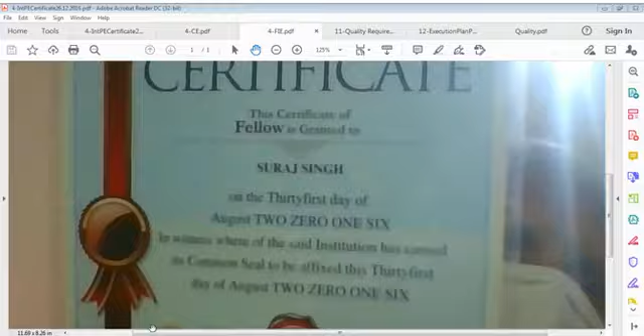This is the certificate of Chartered Engineer, and this is the certificate of Fellow, FIE, Fellow of Institution of Engineers. I usually put these certificates so that you should know the identity of the person.

These certificates carry some meaning, that a person has efficiency in some field, and that efficiency must be exhibited in life. If somebody is a chartered engineer, a professional engineer, it conveys a meaning to people that that person has been testified, his competency is valid.

If we use this person, they must deliver something which is required of that person. That is what this certificate conveys, or whatever certificate people have: degree, diploma, master's, doctoral, or any other professional certificate in whatever profession. These certificates publicly declare - every certificate is a public declaration.

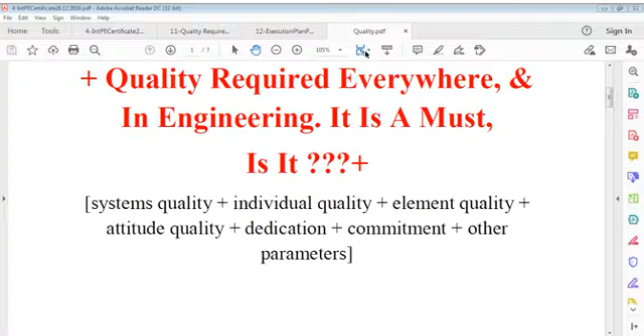There are other parameters which we have to care about in quality, and we move further on to that. The design of structures is another area, because I am dealing with structures, engineers deal with structures, mechanical engineers deal with machine structures and machine designs, electrical people deal with their own system - transformer designs, switchgear designs, and other designs like distribution boards, load calculations. How much electrical load shall come on this building, on this project - they calculate their loads, and similarly other disciplines too. So it's a total system, total theory, total practical theory of design, theory of analysis, theory of structure. All these come into picture.

Ultimately, directly or indirectly, mathematics is involved. You have to calculate electrical load, HVAC load, this load and that load, you have to calculate dead load on structures, live load in structures, you have to calculate other loads - wind load and seismic, etc. We have to do that, it is very normal. There is nothing new in that, and everybody knows according to their own discipline, according to their branch of engineering.

So designs of structures and others must be qualitative and reliable. Design procedures exist, theories exist, everything exists, but thinking doesn't exist.

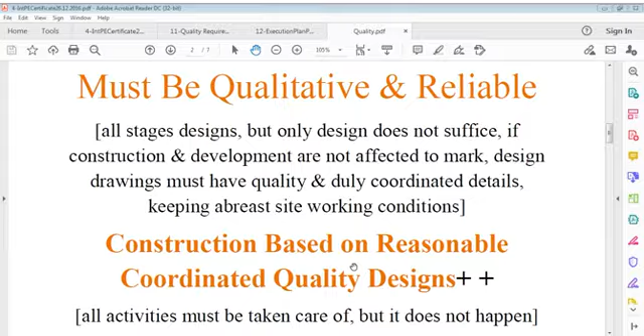Engineering means use your mind, think on, use your mind, and that's a very important point. Thinking doesn't cost anything except time. Thinking doesn't cost anything except your knowledge. And thinking means use of mind repetitively.

Concentration comes from use of mind. If you use mind for the same thing, in the beginning maybe I could not find any answer to my problem. But if I go on thinking like that, certainly the problem would start to be solved. Because your mind works, it grasps something, it has an inbuilt system in our soul that solves that problem. That's what I say, though the explanation is always different.

Thinking, I can use it as a formula, I can use it as a command, I can use it as a direction, I can use it as my own teacher. That thinking pushes me. When I have problems I am not able to solve urgently, I get nervous. But that state of nervousness of an individual can be neutralized by the process of thinking.

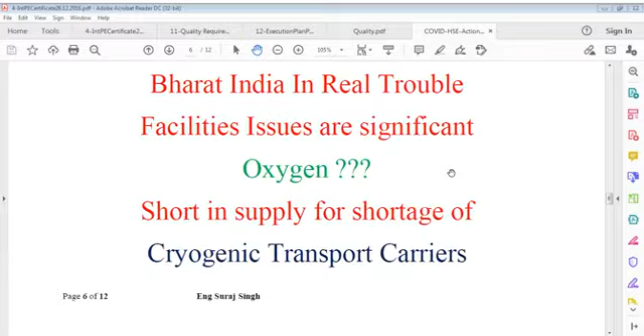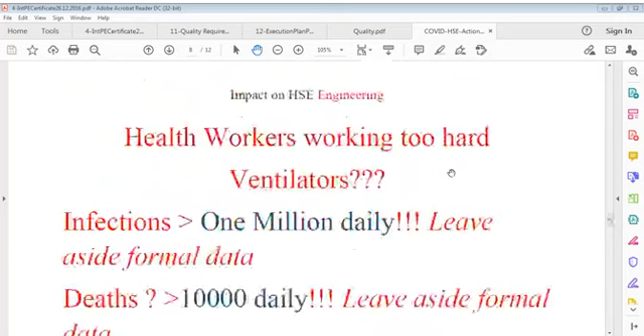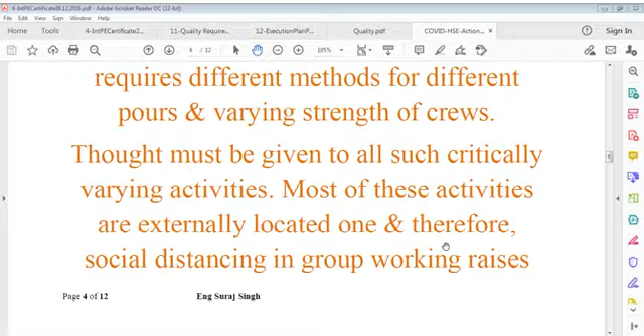That's what I say - Bharat, India, in real trouble. Facilities issues are significant, facility also I can talk about, that is also important. I last time talked about this. Let me repeat it better. It's a safety issue. It's the responsibility of the entire engineering professional community to contemplate on working issues, site working issues, that would be impacted upon due to additional protective measures requirements.

So many activities are critical in a sense which do not permit this. Okay, fine, it's okay. Well, I think I did not do that in this way. I'll include that one later on, now I don't have time for that.

So here you can say, let's take - if I have to design some home, some residence, it may be single story or it may be a multi-story high rise - the engineer has to start thinking now, real time. Design is one part, but planning is also a part of design, which says that if I have to design a multi-story building, structure design is not affected. I'm not saying about that.

What I'm saying is, say I have toilet, bathroom, washroom or WC which are linked to sanitary stacks. You know stacks - vertical pipes connected to waste of WC, night excreta for WC, or bathtub, bathroom, or kitchen. All these are connected to stacks, external stacks, which may be plastic pipes these days. In the past these were cast iron pipes, now these are plastic pipes. I'm not talking of the material of those, but I'm talking of the function of those.

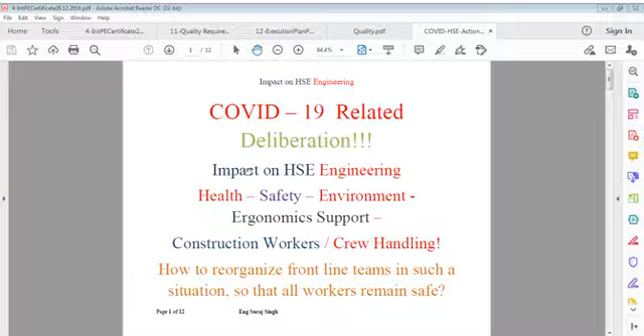Very important point from that aspect we have to consider. And before going further, I think we have to take a short break.

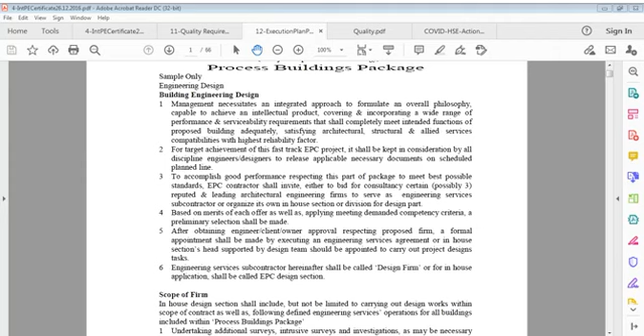So we have to continue on this issue. I was talking about two issues - one was the air conditioning issue, the other was the sanitary issue. Both are important and we cannot do without that. It's a very important point. We have to understand these two issues. Certainly we have to understand - there's no way we can go without that.

Now the point is how much we can move on that. That's the important point. And when I say that, we have to consider in our design the size of duct, which means we have to enlarge our duct size.

Width is not an issue here. The issue is length - maybe you have to make it 3 times, which means the size of the bathroom will be affected, or the room would be affected. Or you have to take different locations at various floors, or stagger your bathroom sizes - 3 in one, then another 3 in another.

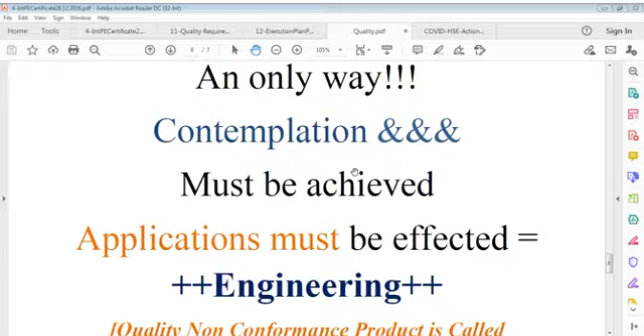But about this design, there's a question mark, so we should understand that design, and we should understand our requirements, and what requirements we have to keep in mind.

Now, quality requirement, and this COVID I close. I think I've talked of this, so better I close it now.

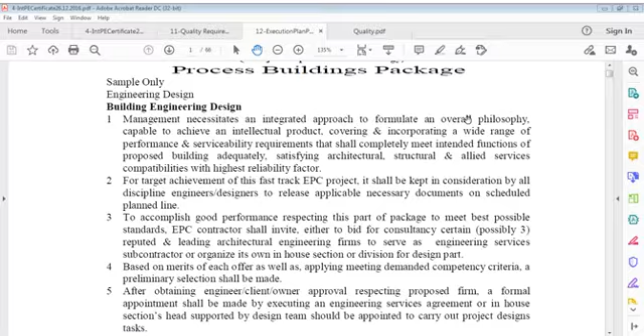Also one file is follow-up, that is building engineering designs, which I discussed before also, but this is such a subject which can be taken up many number of times for further explanation.

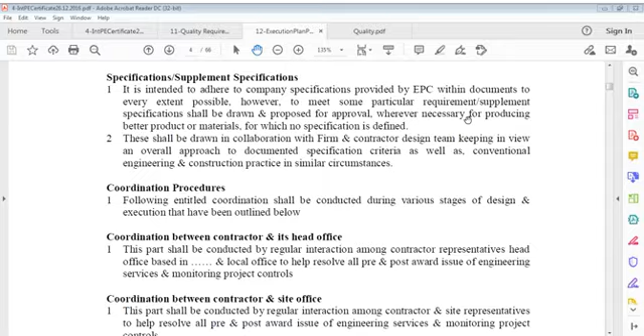Building engineering design, scope of firm, then building services, and detailed engineering design, services designs, specialized designs, specifications, supplement specifications, coordination procedures, coordination between contractor and its head office, coordination between contractor and site office, coordination between contractor and firm, and coordination between contractor, firm and EPC.

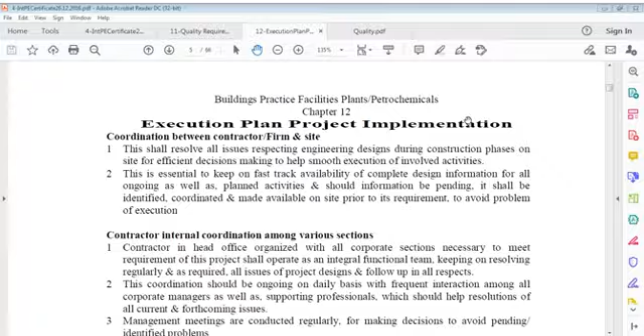There's coordination between firm and site, contractor internal coordination among various sections, likewise review and approval of documents, CAD procedures, engineering reporting and change control, then document control procedures, vendor print, numbering, review and distribution procedures, as-built drawings.

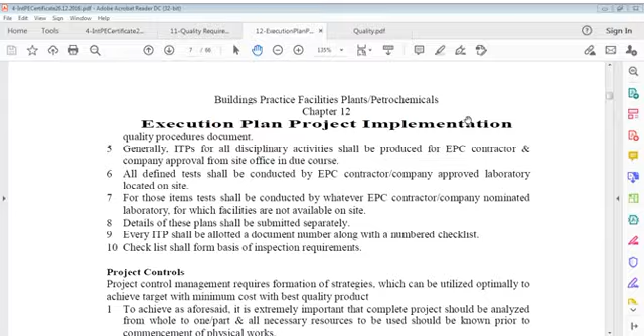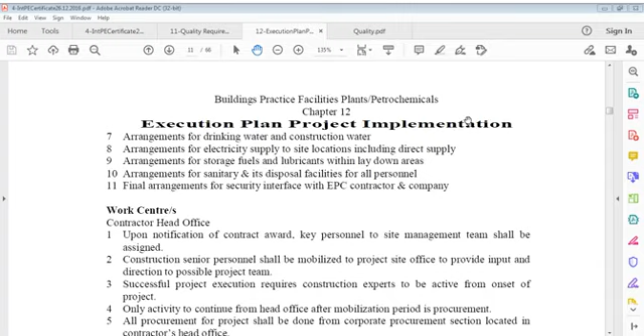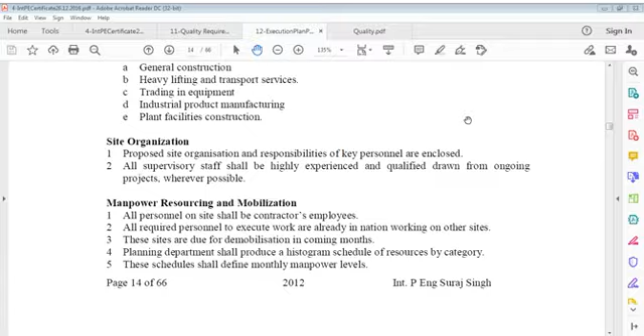Inspection and test plans, project controls, procurement, pre-mobilization planning, work centers, mobilization, subcontract strategy, testing and inspection, material management organization, procurement, corporate organization, site organization, manpower resourcing and mobilization, and like that, construction method statements.

This way we are going to talk a lot on this. There's so much in that you can see. This can see further, you can browse and you can see.

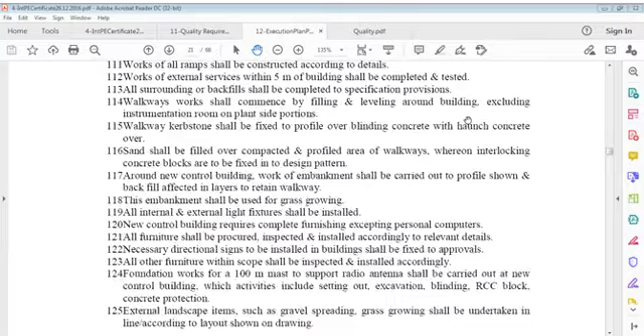And then method statements likewise, so we can see there's a lot in that. We can learn, or we can refresh, if not learn.

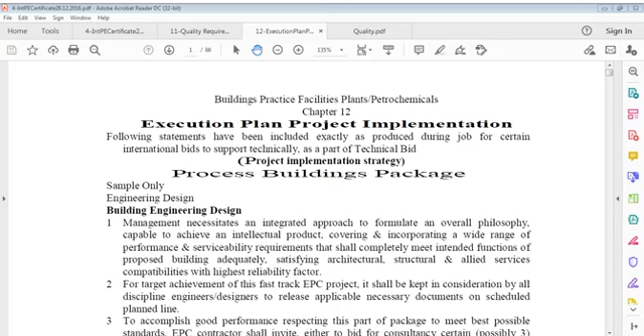Yesterday I talked of something. I was talking of quality requirement, and we had covered certain points in that. I think I was on lift, right?

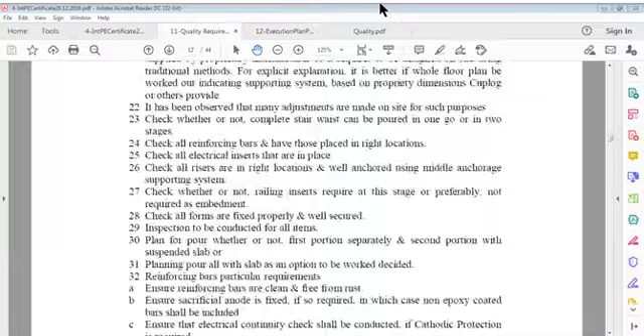No, that's too far, I've gone. Lift well works, okay, this was that.

This is important item. Important in a sense that you have to understand what I'm talking of. If I can say...

I like to go there only. I want to see this file. I want to see that file, and that is the method statement file. I'm trying to find that file.

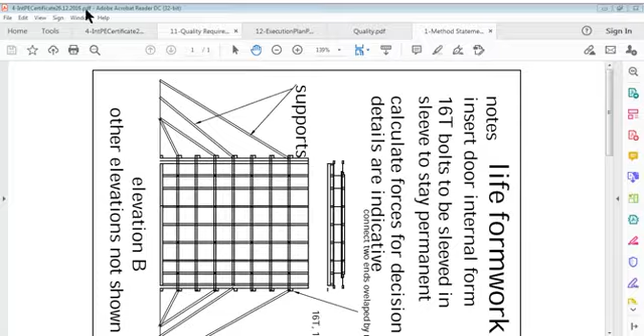Lift. Wall forms and lift form. Yes, it was that.

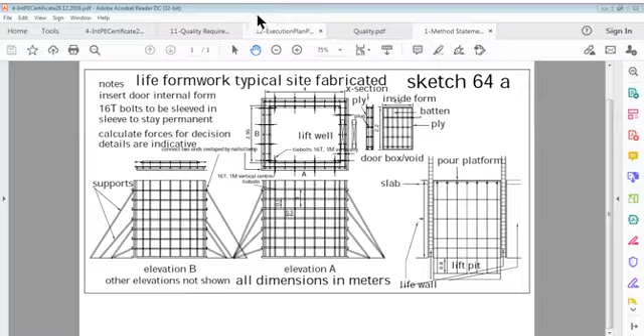So lift it is, and I was talking, you can see again this sketch explained yesterday that we have this proposed concrete, and this is lift well. These are walls, RCC walls, and if you see here section, this is lift pit, this is plinth level or ground level, and this is pit here, it's concrete here, and this is a lift wall.

In which the lift car will move. This portion the lift has come down, and this base, and what is interesting, we have to pour these walls in this portion. We have to pour in each floor, and there is a door also which you have to keep out of the concrete. This is basic requirement, and I had explained to you about how we have to do that, how we have to compute forces, how shall we handle it.

It's not that easy as we think. It's a lot of work in this requirement.

Let me explain to you that there are two stages in pouring these lift walls in one story. I'm saying stages, I'm not saying layers. In one stage, this height is 2.2 meters, that is the door of the lift. Up to this we have to pour, and then from there onwards, up to whatever height is there, we have to pour. So these two stages, of course.

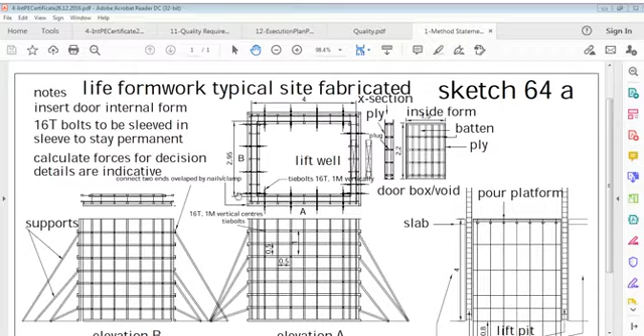This formwork here, this is both sides formwork. It can't be one side. It has to fit in. So this is, you can say, double formwork. And also like this double formwork here for the wall. And you can see all of the details, same typical.

As I said, this is void, and this is plates. This is standing battens at 0.5 meter, and you can say 8 sides, 4 sides A and 4 sides B elevations, and this is normally done. So we can now speak about this. Let us see how does it work.

Yesterday I read it again because it's an important one. We have to understand it all the time. It's better if you understand it all the time rather than risking it. I don't want to risk it, I want to understand it, and that's the main point. So we can say checklist for RCC lift well walls.

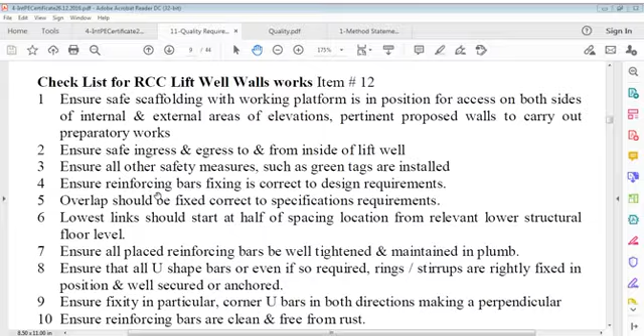And ensure all the safety measures such as green tags are installed, which means this system, whatever we provide for ingress and egress from the working area, from inside as well as outside, internal to external, this must be certified, this must be tagged by safety engineers, so you can say that this is a norm of safety.

Then you can say, ensure reinforcement bars are fixed correct to design requirement. That's very much structural work. Already bars are there up to the starter, taken from the pit. Now we have to fix all bars of reinforcement up to a level of 4 meters and overlap further, according to whatever is given in the drawing. You have to fix all those reinforcing details according to your drawing, and these bars, which you have cut and bent according to the bar bending schedule, must be fixed or placed correctly and in compliance with design requirements. Overlap should be fixed correct to specification requirement, no change, whatever the specification requires, this should be there. Overlaps mean 50d or 40d according to tension requirement or compression requirement respectively, and that's what we have to do.

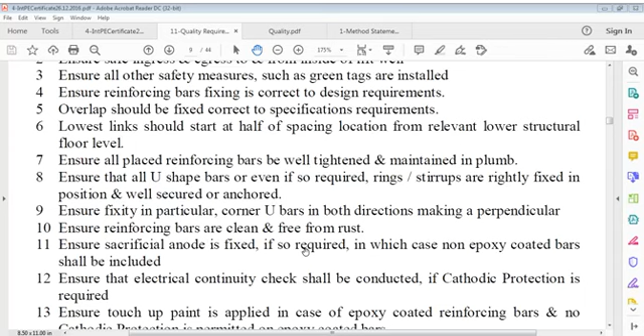Of course there are U-shaped bars at corners. I told you yesterday also, U-shaped bars would be here. At these corners, U-shaped bars in both ways at 90 degrees, here this way and that way, and you can fix a U-shaped bar here as well if possible. So rings or stirrups should be rightly fixed in position and well secured or anchored. Ensure fixity particularly at corner U-bars in both directions, making them perpendicular.

Ensure reinforcing bars are clean and free from rust. That's a very important point I always say, that these bars must be rust free. No engineer accepts a bar with rust. That's not good and not permissible. This is going to be a durable structure and we can't allow rust in that.

So reinforcing bars must be clean and free from rust, and if these are epoxy coated bars, the question of rust doesn't arise. Then we have to consider application of sacrificial anode. Ensure the sacrificial anode is fixed, meaning the anode accepts oxidation instead of the bars, so the anode is responsible for that rather than the bars being oxidized. With due controls, the anode is oxidized and rusted. It's made of aluminum, with an electrical mechanism involved, so ensure the sacrificial anode is fixed.

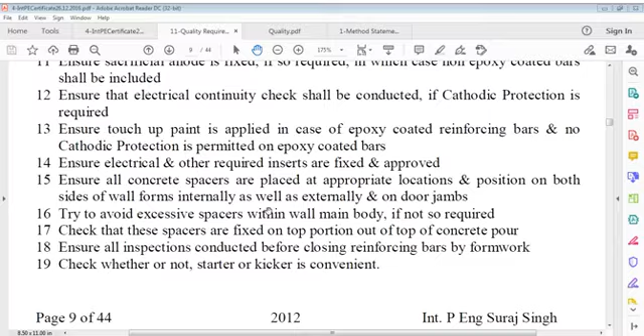Now you can say electrical and other required inserts are fixed and approved, and concrete spacers are in place. Try to avoid excessive spacers. That's fine, you can remove them, and check that these spacers are fixed on top portion, out of top. I told it. Now ensure all inspections are conducted before closing reinforcing bars by formwork.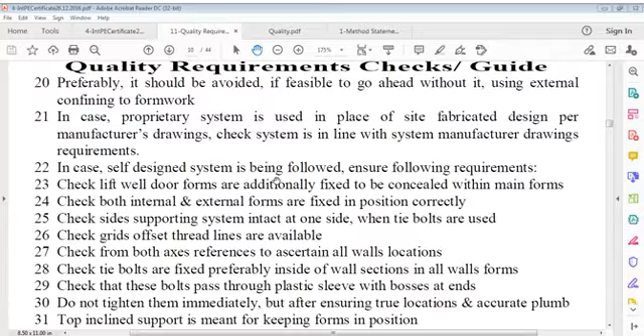Check whether or not starter or kicker is convenient. Preferably it should be avoided if feasible to go ahead without it, using external confined support for that. So avoid it. And what's that? Check whether or not starter or kicker is convenient. Nobody likes kicker. If it can be avoided, there are ways to avoid it. I have done it. But if you know how to provide it, there's no barricade, you can provide it.

It's only 10 centimeter or 15 centimeter thickness. It just gives you a facility that your form at bottom is fixed, but sometimes it causes a problem also in alignment if there's some error in kicker. Then you may not realize that this problem is coming from the kicker because you have no such experience. In that case, you can say, okay, let him come back.

Then we can say, okay, let's go further. Preferably it should be avoided, the kicker, if feasible to go ahead without it, using external confining to formwork. In case we are able to remove or avoid kicker, it's better. Due to misalignment also it may cause some problem in formwork, and we have to sometimes chip one side or two sides. It's problematic sometimes.

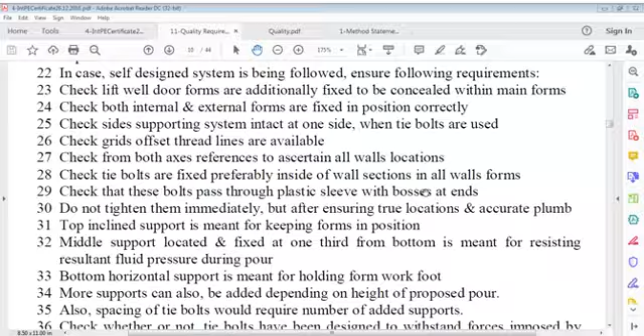Check that tie bolts are fixed, preferably inside of wall sections, in all wall forms.

Check that these bolts pass through a plastic sleeve with bosses at the ends. The bosses would be removed later on and filled in with some construction chemical.

Do not tighten them immediately, but only after ensuring true locations and accurate plumb. The top inclined support is meant for keeping forms in position. Top and bottom supports are meant for fixing the form sections particularly.

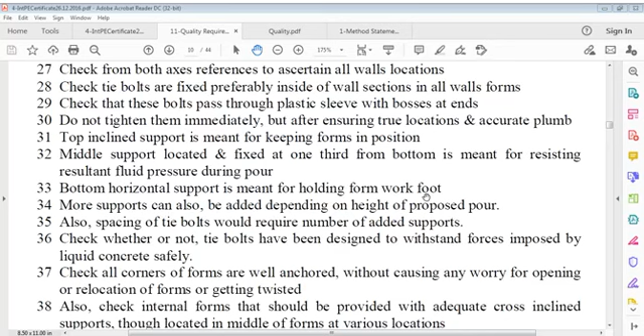The middle support, located and fixed at one-third from bottom, is meant for resisting the resultant fluid pressure during the pour. H/3 is the height of application of fluid pressure.

When you calculate fluid pressure for water retaining structures, that's called WH/2 - the horizontal force intensity. If it's multiplied by H/3, it gives you WH²/6, which is the moment.

Keep this in mind: the moment at the bottom is this much, and this is the core.

Then we can say we have reached the statement to check whether or not the tie bolts have been designed to withstand forces imposed by liquid concrete safely, and check that all corners of forms are well anchored without causing any worry for opening, relocation of forms, or getting twisted.

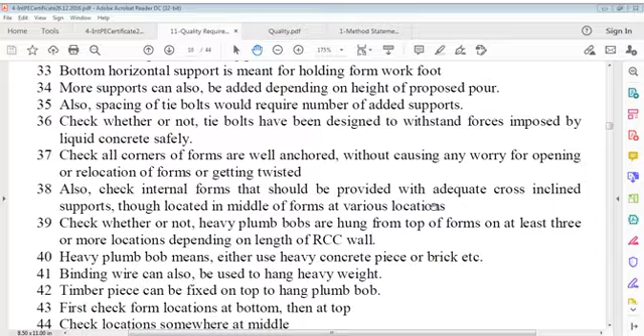We are talking here about these corners and these corners. There's pressure from this end and pressure from this end. So this can go out this way, this can go out this way, and this can go out this way too. They should not go out - you have to make sure.

We'll tie them up additionally for inside and outside. So check that all corners and forms are well anchored without causing any worry for opening or relocation of forms or getting twisted. Also check internal forms.

Internal forms should be provided with adequate cross inclined supports, though located in the middle of forms at various locations, and we have told you what that is - very easy.

We have to see them. Again I repeat, also check internal forms that should be provided with adequate cross inclined supports, though located in the middle of the form at various locations.

Check whether or not heavy plumb bobs are hung from the top of the forms at at least three or more locations, depending on the length of the RCC wall.

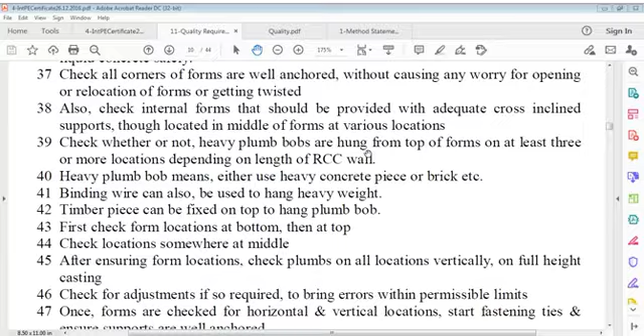Now, a heavy plumb bob means either use a heavy concrete piece, brick, or block, etc. You may have debris on site, or you may have concrete pieces on site.

After ensuring this, check the location somewhere at the middle. Before that, you can say a heavy plumb bob means either use a heavy concrete piece or brick, etc.

Binding wire can also be used to hang the heavy weight. A timber piece can be fixed on top to hang the plumb bob.

First check form locations at the bottom, then at the top. Check the location somewhere at the middle as well.

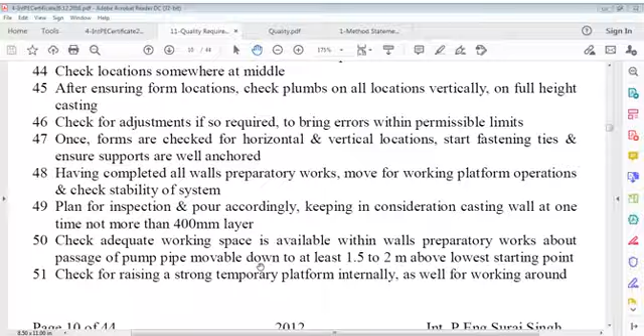We have to go back - it says that once forms are checked for horizontal and vertical locations, start fastening ties and ensure supports are well anchored.

Having completed all wall preparatory works, move for working platform operations and check stability of the system.

Having completed all preparatory wall works, move for working platform operations and check stability of system. Plan for inspection and pour accordingly, keeping in consideration casting wall at one time not more than 400 mm layer. Check adequate working space is available within walls preparatory works, about passage of pump pipe movable down to at least 1.5 to 2 meters above, for purpose of controlling segregation. Above lowest contact starting point, check for raising a strong temporary platform internally as well as for external works.

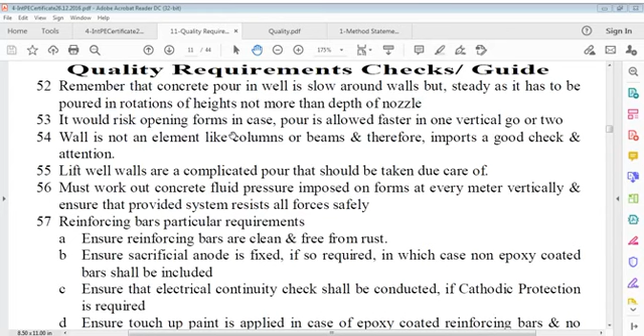Lift well walls are a complicated pour item that should be taken care of, due care of. Must work out concrete fluid pressure imposed on forms at every meter vertically and ensure that provided system resists all forces safely.

Reinforcing bars particular requirements: ensure reinforcing bars are clean and free from rust. That is main requirement. Also ensure sacrificial anode is fixed if so required, in which case non-epoxy coated bars shall be included. Ensure that electrical continuity check shall be conducted if cathodic protection is required, and ensure touch-up paint is applied in case of epoxy coated reinforcing bars, and no cathodic protection is permitted on epoxy coated bars.

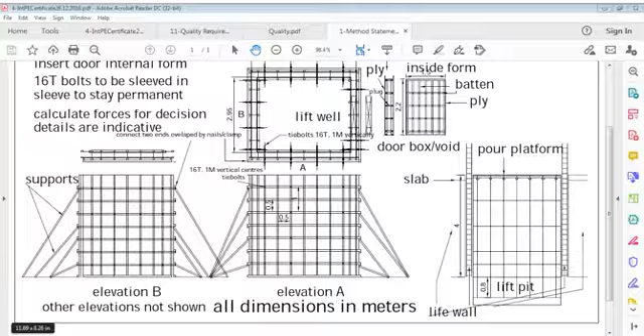So we can say that many cubic meters, it will take how many hours? There are 10 layers, so if 0.56 into 4, 2.5 cubic meter approximately takes half an hour, and there will be 10 layers, so 10 hours more. You have to consider that way. 10 hours more, it's a big pour. It's a time consuming pour, we can't cover that. So let's go to the other one.

Staircase works. Let us see how it works.

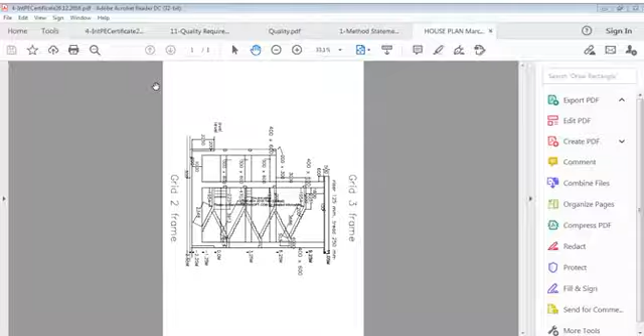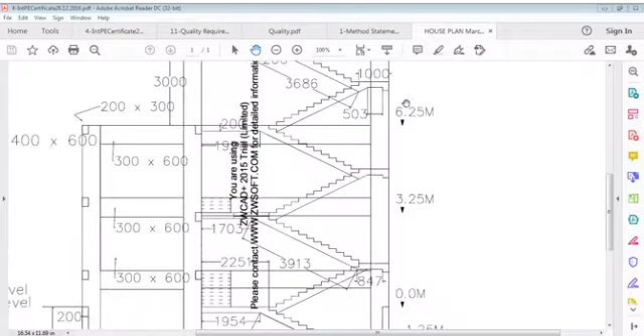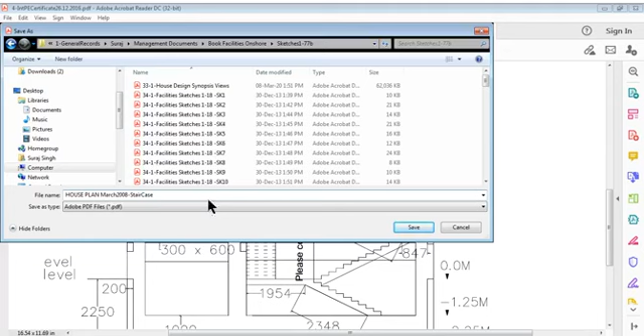Just trying to find if I can get some drawing of staircase, let's see if I can find some drawings. It'll be okay, otherwise I'll come back immediately. Let me see some other, not this one. Let me see this one, if I can find something here. Geometry, no, not geometry. Something, I forget what it was. I think that one, okay, let me see which drawing is that. Old drawings, alright, old drawings here. Let me see how it works, just give me some time, we have till that time. It's opening up, let me see how it opens. Okay, if you can open, I'll find that, I'll do it, I like to see if something is there. I'm getting this drawing, meanwhile you can read this and stare at this drawing. I'm supposing it is and must be, but it's an AutoCAD, so don't worry about that. I'll make it, you can see I got it done. So let me see how can I do it. A plot is set up, plot payment, plot style, plot, I'm just going to plot it. And let us see if I can do it, I think it's better, window, that window is here. I think I got it. So I'm lucky that I got it here. So you can see this staircase here. This is a staircase here, you can take savings of this also, let me save it also in this staircase. Let me see staircase. Okay, now we got this staircase here. I can also see if something is better if we can find. I think I will not find anything else. So I close this file.

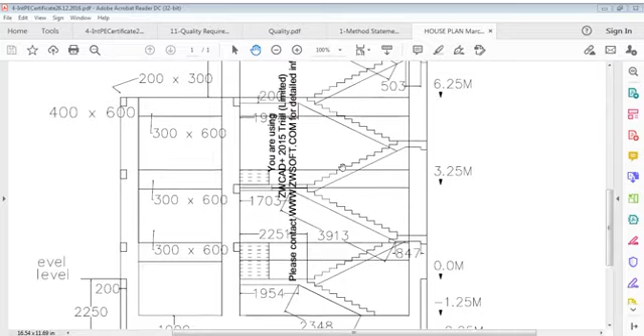Alright gentlemen, what happened now? I have for you this section of staircase which I am going to talk about. This is beam, or you can say foundation, from where this basement portion here. This is ground floor, this is first floor, and this is second floor, and this is stair cover. This general construction of staircase, I have to understand that. It's a very important point, general construction of staircase. So let me put some.

So I'm going to discuss this staircase, the formwork of the staircase.

Now what happens? You can see in this staircase, it starts here at the basement, and because this height goes up to here, we have this landing. This is a different height, not like others. So you can say we start from here, but here we start from here, and this is the waist slab.

This is the waist, and this is below the floor, below the slab. This one is the soffit, and these are the steps, equal steps. You can say here 125 mm is the riser, 125 mm is the riser, and accordingly the treads.

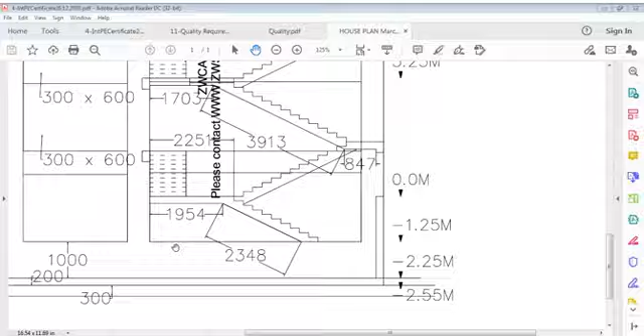So we give this dimension in sketch form, so that they can fix all of this successfully. Here also you can see I tried to give this dimension, not shown in this time, but we try to give these dimensions here, this dimension.

Similarly, we try to give all dimensions, like this dimension here, this dimension here, and the landing dimension is known. But we have to give this beam dimension, we know we have to give this dimension here, this beam they know.

This they have to be given, we have to give them. It's 503 for example, they can join these points. Complete dimension must be given to them.

For example, this dimension is there, this dimension is there, the top dimension they know, that's in the plan, and better you give it also. So this dimension is for work purpose, this dimension is for work purpose here.

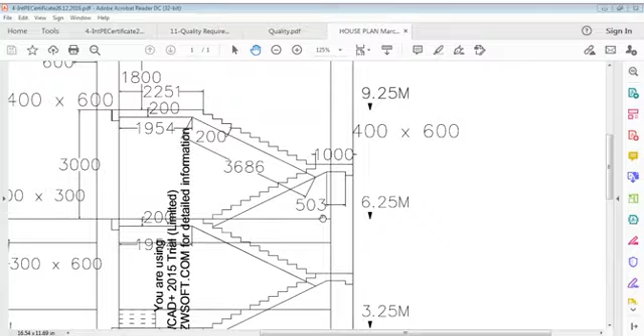Of course, then this dimension is known and this dimension is known. All those dimensions on which the form is to be done must be given to them, not surfacing form.

At that moment when they work on shutters, if this waist form profile is clear, that is the main requirement. It's minimum, I'm telling you.

If I complete, there's another triangle also, but I'm showing you this one only. For the staircase, particularly for this staircase, the riser is 125 mm and the tread is 250 mm. I decided the floor height based on this.

I did not work out the riser, but I worked out the floor height based on this riser. There are 26 risers here in one floor.

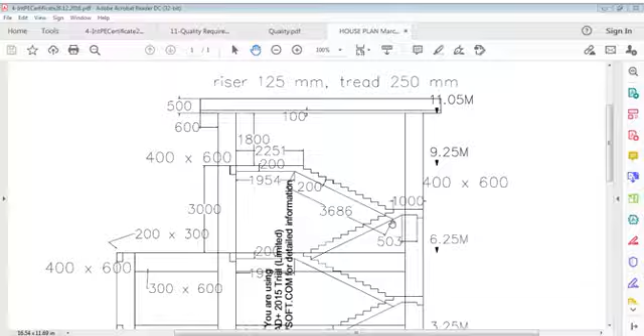Yes, whatever number of risers there are, you can fix them and find the floor height.

Other framing is there. You can see these columns, main columns, beams, all the framing is available there. And all these beams are in foundations, no footing, and these are cross beams.

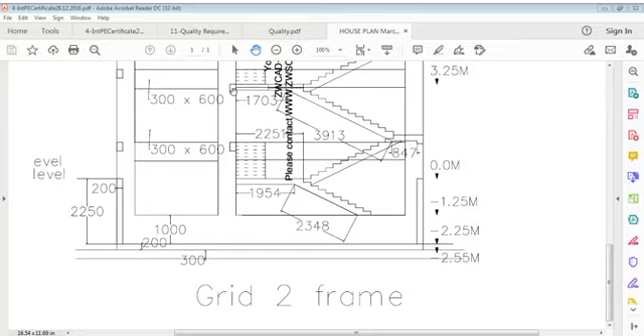Here it's not framing, it's cross beams, the framing is here only this. And this span is approximately here, let's say from here to here. Here to here, sorry, here to here is about 11 meters or more, this one.

You have to keep that in mind. So what it says in the method: conduct, you can say,

Conduct in-depth coordination on drawings for relevant involved activities.

Actual details pertaining to follow-up settings should be charted out clearly for communication to site.

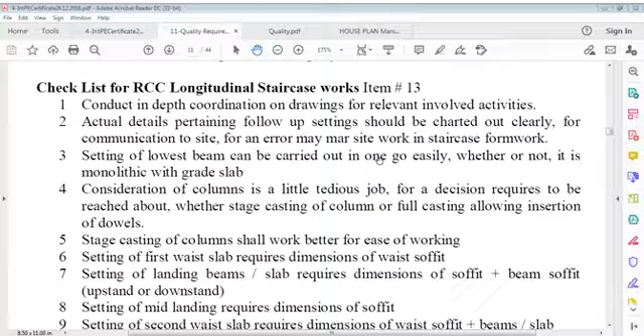Because an error, when I say this, it's because an error may mar site work in staircase formwork. Setting of the lowest beam can be carried out in one go easily, whether or not it is monolithic with the grade slab.

I'm talking of this beam, that is this beam here, which starts here, because there's no continuity here. This beam is a terminating beam here. It can be done in the grade slab.

You have to decide that one, because only half of this load is coming here and the upper loads are not coming onto this. So you can say

what it says: setting of the lowest beam can be carried out in one go easily, whether or not it is monolithic with the grade slab. Monolithic with the grade slab.

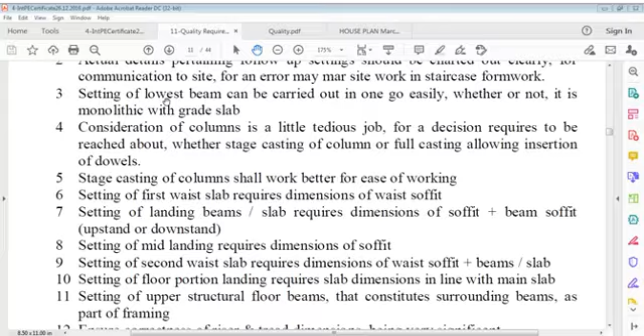Setting of lowest beam can be carried out in one go easily, whether or not it is monolithic with grade slab. Consideration of columns is a little tedious job, for a decision requires to be reached about whether stage casting of columns or full casting allowing insertion of dowels.

That's what I'm talking about, and it is here. Now in this portion you have to see that this landing is coming here, and this second flight is going to slab. If this waist and this landing are there, though it's not full landing, let us say there is another one here, another step. So this portion here meets column. This is structural slab and this is structural column, and we have beams as well.

Now common sense says that we have to cast this column up to here first. Otherwise this reinforcement, where does it go, you can't take it to columns by dowels, it's impossible. So we have to cast this column up to here, and this column we have to take full. That is what is important. We have to decide that way.

Here this is slab portion with column, and if we cast this column here, this is one stage, and another stage comes from here about here, where construction joint comes somewhere here. If you have capacity you can take both, but that is generally not done. Practice is you have to make a construction joint here, just to make construction joint here, and this portion with slab be cast. That is the main point.

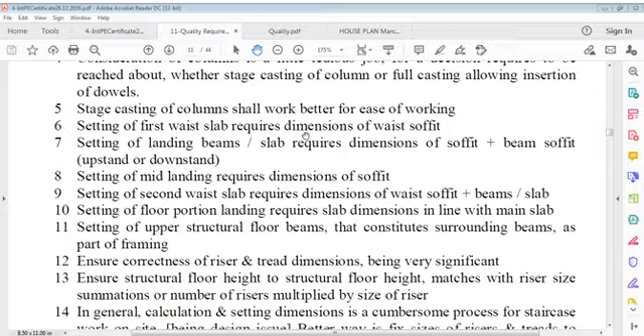Now setting of first waist slab requires dimensions of waist slab, requires dimensions of waist soffit. Now setting out of the dimensions I told you, these dimensions I'm talking of, these dimensions, these dimensions, all such dimensions they have to say, we have to give them. This we can give, no problem.

Setting of landing beams slab requires dimensions of soffit and beam soffit, upstand or downstand, whatever it is. Generally here you see, generally I am telling you, it's not necessary. Landing here, in this case we generally can take upstand, not shown here but it's shown somewhere else. Upstand we can take here, and we can take upstand here also.

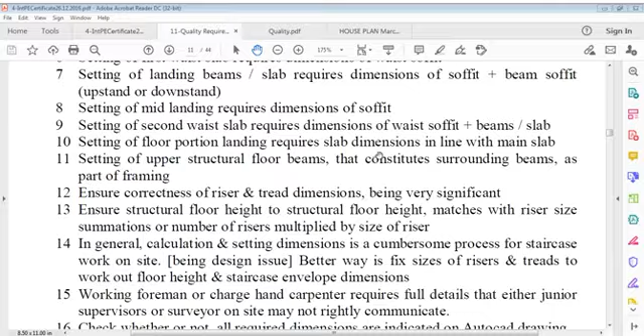So I say setting of landing beams and slabs requires dimensions of soffit and beam soffit, upstand or downstand. Setting of mid-landing requires dimensions of soffit. Setting of second waist slab requires dimension of waist soffit and beams and slabs. Setting of floor portion landing requires slab dimensions in line with main slab.

Setting of upper structural floor beams that constitute surrounding beams as part of framing. I mean to say, when we are here, our structural slab and beams are here, but I'm talking of this slab, this beam. I'm not showing plan here, but if you see plan, this would come and go, then this way and then go back. These three beams, two parallel to stay here, and this, they are taking here at mid level or landing level. So I am talking about these beams.

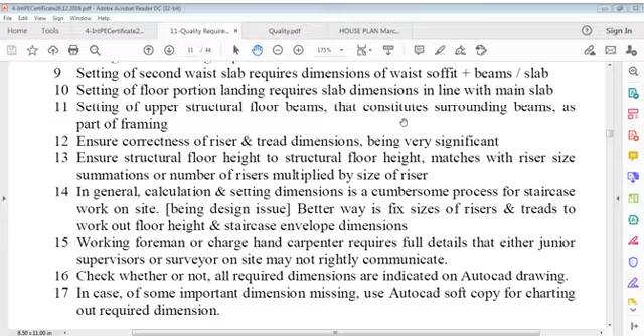Setting of upper structural floor beams that constitute surrounding beams as part of framing. Ensure correctness of riser and tread dimensions being very significant. Ensure structural floor height to structural floor height matches with riser size summation, or number of risers multiplied by size of riser. So that shall be the floor to floor height, rather than considering floor to floor height and finding vertical dimension of risers.

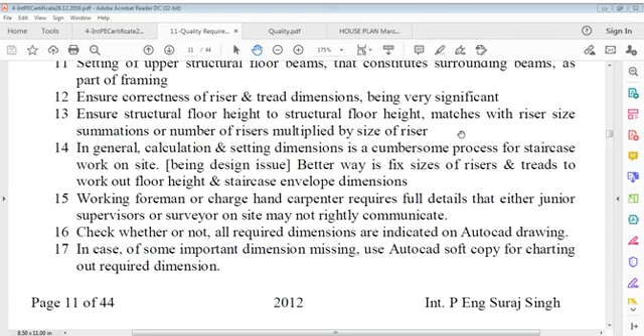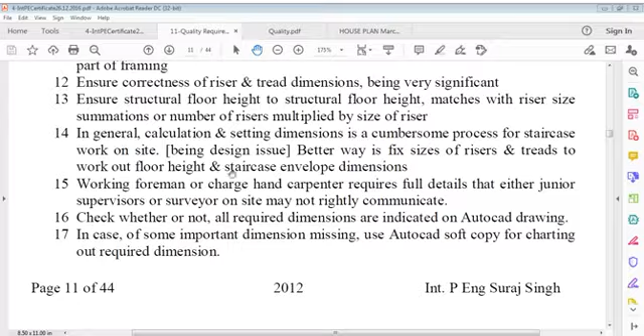In general, calculation and setting dimensions is a cumbersome process for staircase work on site. Being a design issue, it is better to fix sizes of risers and treads to work out floor height and staircase envelope dimensions. Working foreman or charge hand carpenter requires full details that either junior supervisors or surveyor on site may not rightly communicate. Check whether or not all required dimensions are indicated on drawing.

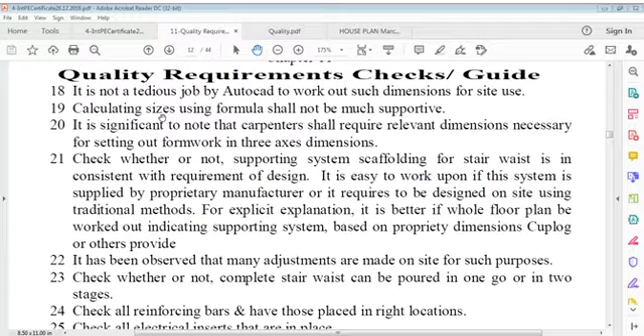In case of some important dimension missing, use soft copy for charting out required dimension. It's not a tedious job by AutoCAD or software to work out such dimensions for site use. Calculating sizes using formula shall not be much supportive. It is significant to note that carpenters shall require relevant dimensions necessary for setting out formwork in 3-axis dimensions.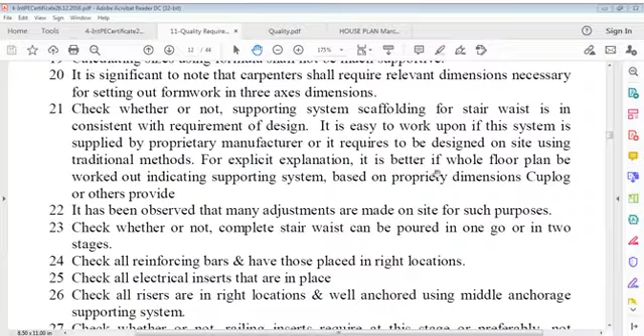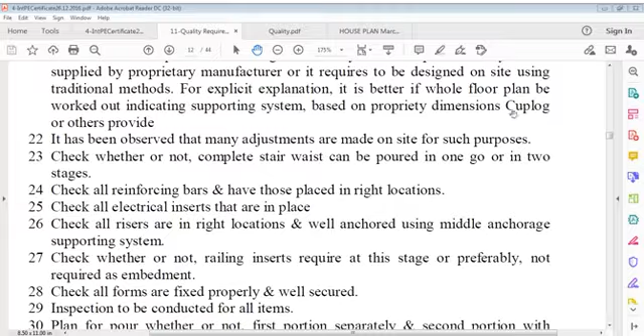Check whether or not supporting system scaffolding for stair waist is consistent with requirement of design. It's easy to work upon if this system is supplied by proprietary manufacturers, or it requires to be designed on site using traditional methods. For explicit explanation, it is better if whole floor plan be worked out, indicating supporting system based on proprietary dimensions, Cuplog or others provide.

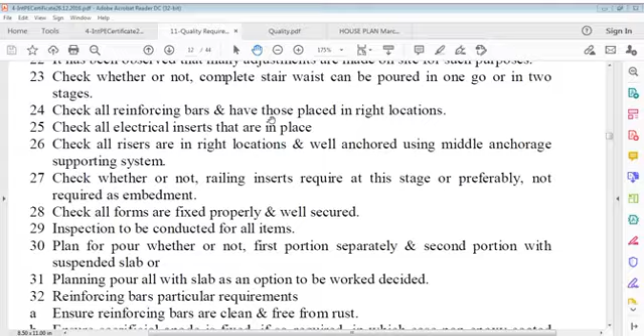It has been observed that many adjustments are made on site for such purposes. Check whether or not complete stair waist can be poured in one go or in two stages. Check all reinforcing bars and have those placed in right locations.

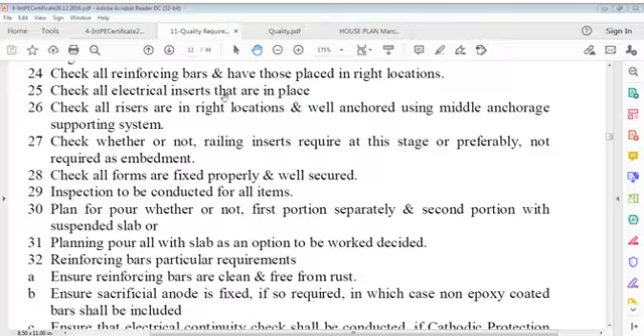Check all reinforcing bars and have those placed in right locations. Check all electrical inserts that are in place. The important item, electrical inserts. Complicated, maybe not much, but some electrical points and soffit in both flights and their panels on waist edges.

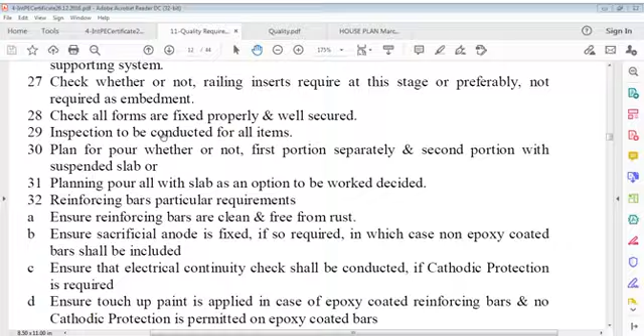Check all risers are in right locations and well anchored using middle anchorage supporting system. Check whether or not railing inserts, handrail inserts required at this stage or preferably not required as embedments. Check all forms are fixed properly and well secured.

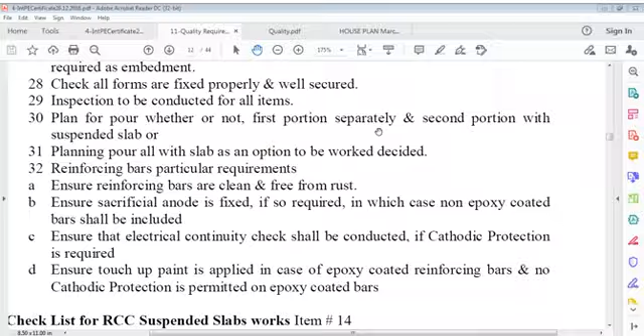Inspections to be conducted for all items. Plan for pour whether or not first portion separately and second portion with suspended slab, or planning pour all with slab as an option to be decided.

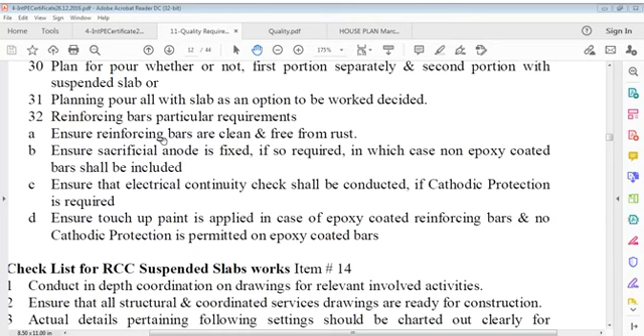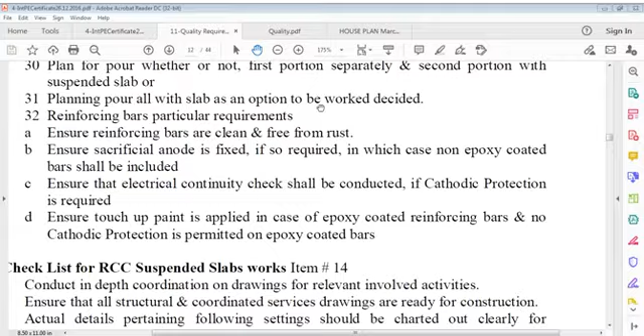I repeat, plan for pour whether or not first portion separately and second portion with suspended slab, or plan pour all with slab as an option to be decided. And how you want to pour, you have to decide. It's your choice how it's feasible for you and how it's applicable depending on type of stair we have. It may be dog leg stair or some other where your shuttering should not be trapped in.

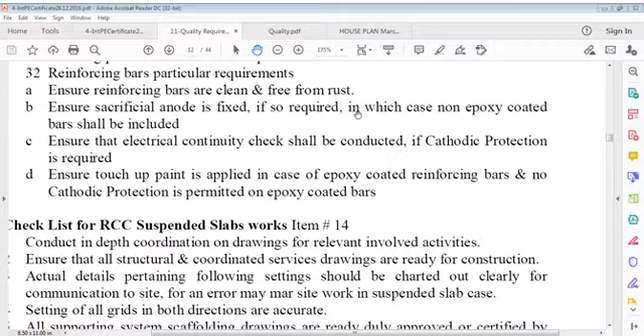Reinforcing bars particular requirements, as we said before. Ensure reinforcing bars are clean and free from rust. Ensure sacrificial anode is fixed if so required, in which case non-epoxy coated bars shall be included. Ensure electrical continuity check shall be conducted if cathodic protection is required. Ensure touch-up paint is applied in case of epoxy-coated reinforcing bars, and no cathodic protection is permitted on epoxy-coated bars.

I have given these statements today in furthering this quality requirement, and this shall be useful on sites if you are working in some good construction industry, probably in this country as well, and also overseas in Gulf countries in particular, because standard of quality is much better if you take example of Iraq or Qatar, or you take examples in UAE. Generally in Qatar and UAE they have their own standards of specifications, and also in oil sector specifications of ADNOC and QP work there, which are much advanced. So we have to apply their applications, their specifications, and these specifications I am sharing with you generally come from that.

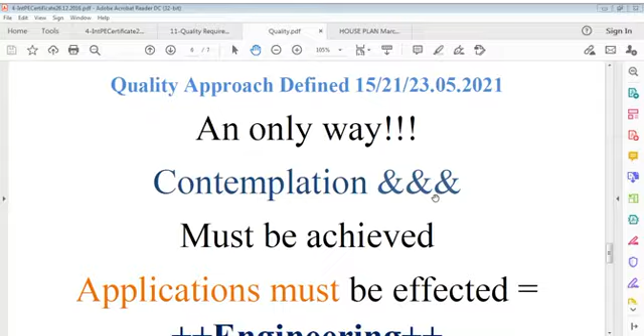Sometimes it's good time, sometimes it's not good, but quality has to continue. There is no way we can say no, but yes, quality has to work, and it is only because of engineers that quality works. If engineers are determined in that way, quality would work, and if they are not determined, then we have to forget quality. That's the main point.